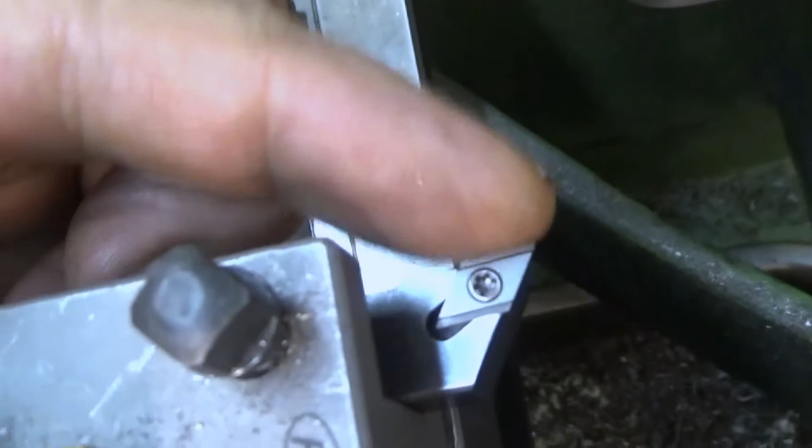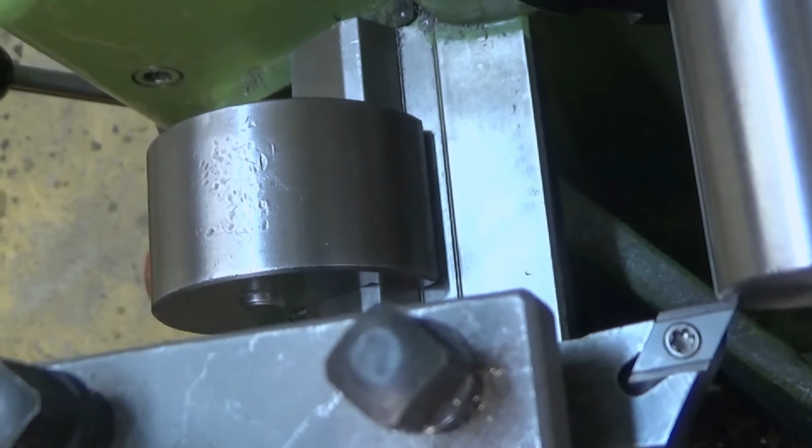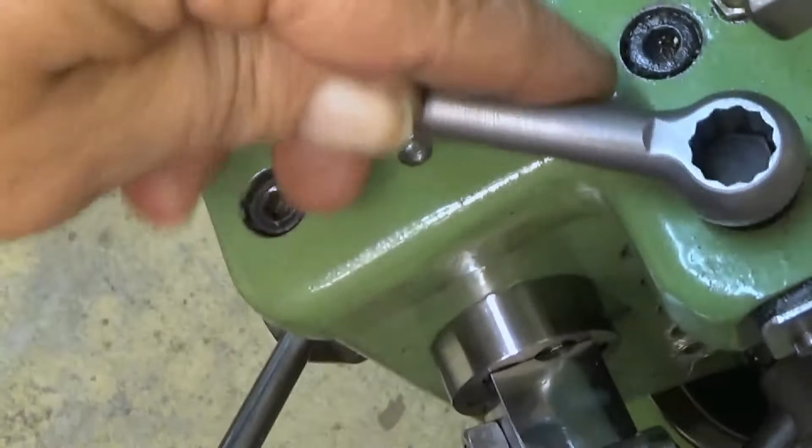There you are, I'm going to use that insert. That's very sharp and it doesn't introduce too much cutting forces. So now I will move the carriage so that it touches this surface here. That's there now, and then I will lock - here is the carriage lock. I will actually lock the carriage here, like that. Then I will move it back away from that, so that I don't damage that one.

And now we have a nice feature in this lathe, namely I installed this DRO recently. So I will now reset that one.

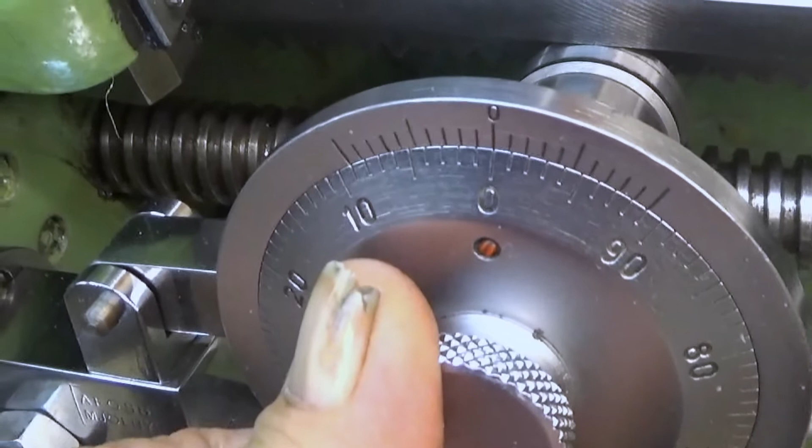This is the first time I use it actually for something. Okay, now it's there. I can now unlock my carriage, like that.

And then we needed 18 millimeters. 18. So, that's 10 millimeters. 18. There you are, 18 millimeters. Lock the carriage again, so I don't lose that place.

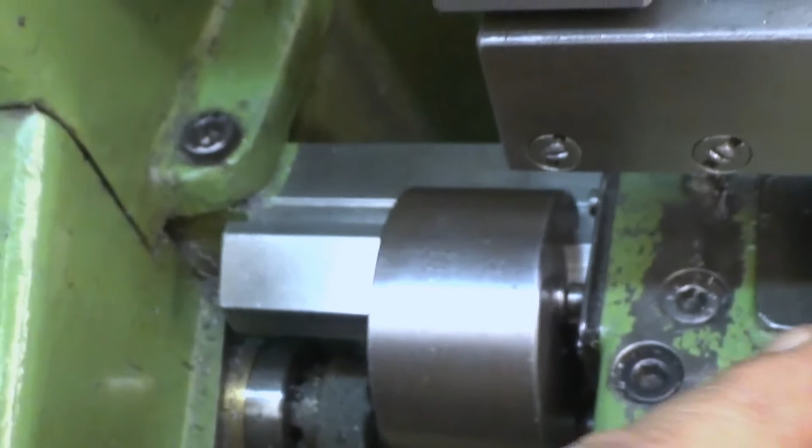And then, since the carriage is now locked, here is our carriage stop. I put it against this thing here, like that. This is the carriage stop. So when the carriage moves towards the headstock, it will stop here. And there is a ratchet mechanism inside this thing which makes it so that it doesn't damage the lathe even though it's a hard stop.

So now what happens, I can check this by loosening now the carriage again. And let's see, now we have here 18 millimeters. So let's move back and go back there. It stops to 18 millimeters.

So now the resulting thing is that we get 18 millimeters here, like peeled off. And now I don't need to worry about when to stop the carriage. I can use the feed. It stops automatically whenever I do this.

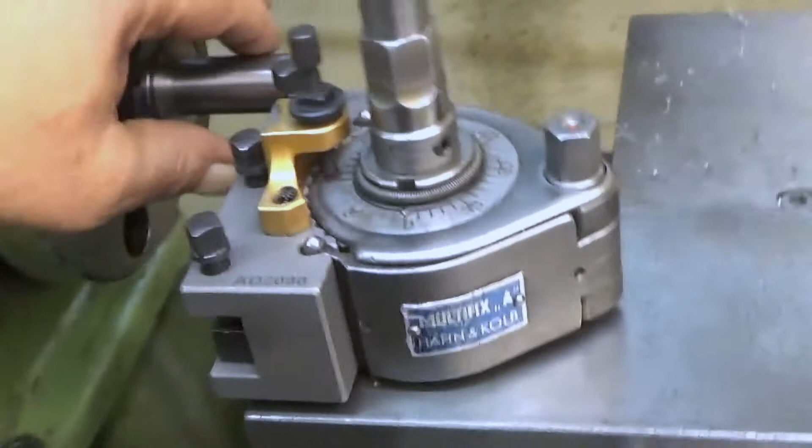And now I can take care of the diameter, which is actually quite important here. And the cut is 0.5 millimeters, meaning 0.25 millimeters per side.

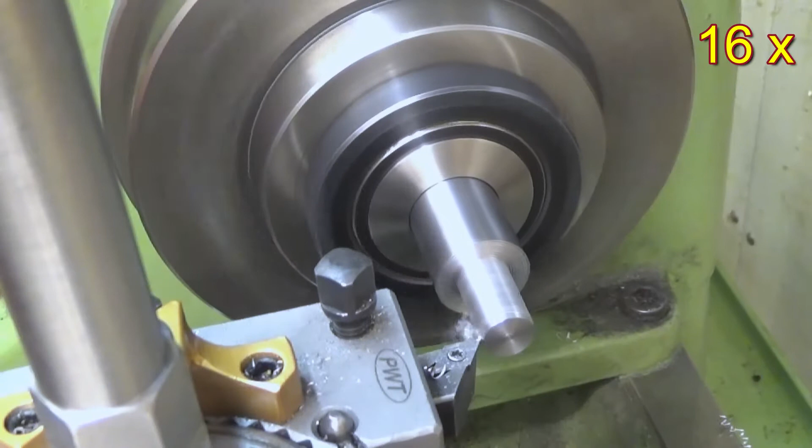Let's make this really accurate. So, and the surface finish is really good. We should be now 10.25. Well, we should be. We are 10.24. Okay, that's okay.

So, that's the last pass. Okay.

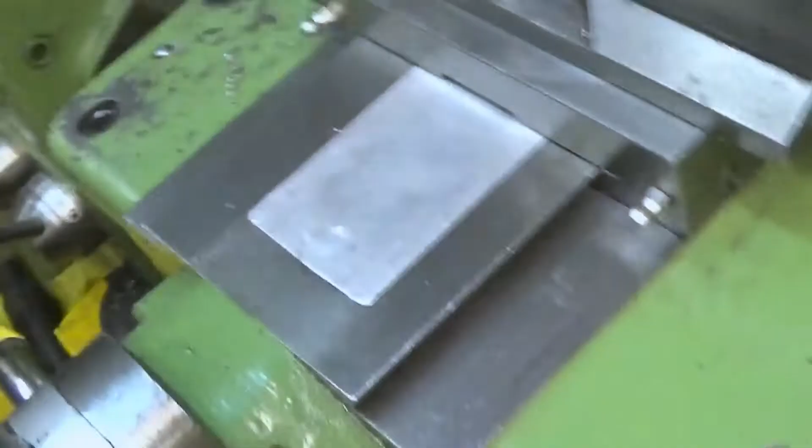We are now there, and I didn't disengage the feed. So the feed is now on. It has been pushing itself towards the workpiece, and now the tool is there, like in the workpiece. I will lock the carriage here. Like that. Now the carriage stays there.

Then I can disengage this, and then I unlock the compound like that. And what I will do next, I will actually feed in here just a little bit, and then I will face this surface. So let's do that.

I will restart this. It should do nothing, just rotate there. But now I feed with the compound a little bit. Like there. And then I feed by hand, coming out from there.

And there you have a very, very nice shoulder. Yeah, Chuck.

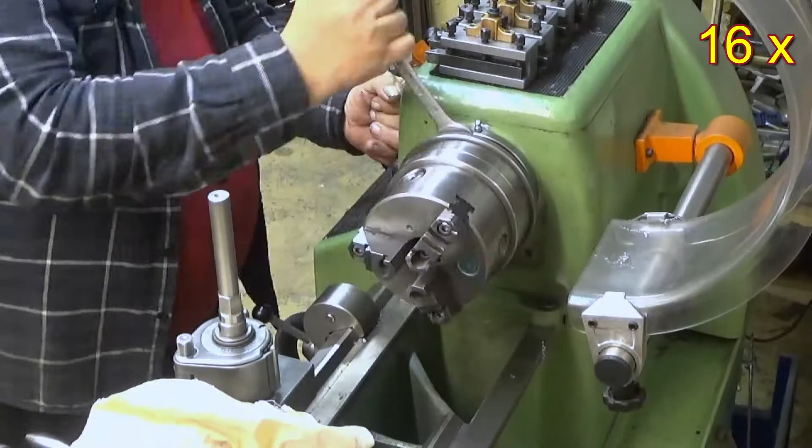So that is one. I have here like dimples. This one is one, and that's two. That's number three, and that's one.

Well, since it's now out from there, so I will actually do some cleaning for it. Yeah.

So, and which one is the one? That's the one. Well, that one is one. That's one too.

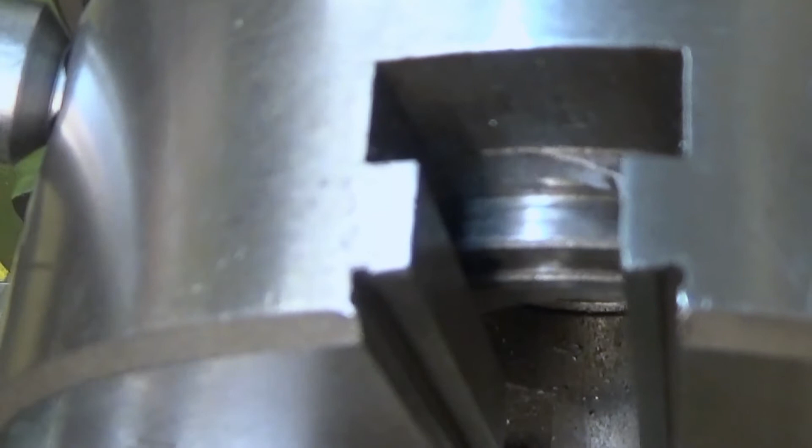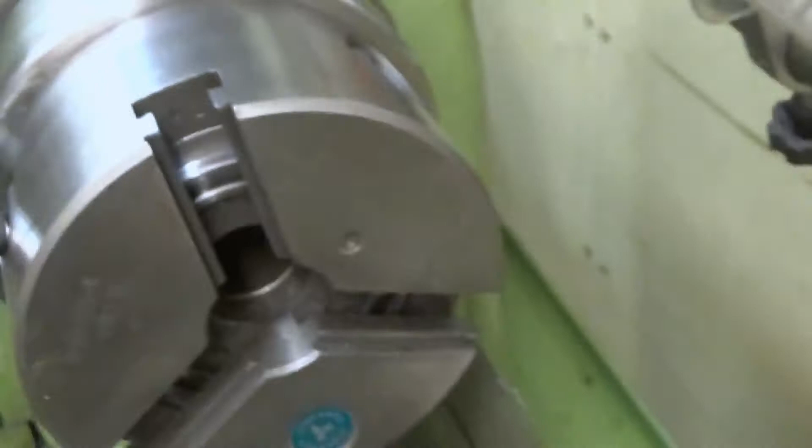So we need to put these back. So when I turn this here, at some point, as you can see, there is the start of the spiral. Okay, so I put it back there like waiting for me. And then when it's waiting for me there, I put my first jaw here and put it there, like that.

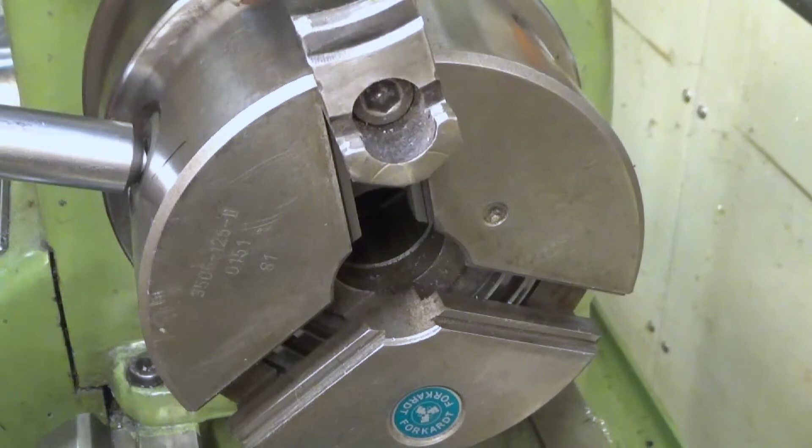Well, it's a very good idea to mark those in chalk, which one goes to which. You could mix them if you didn't, but that would be a problem.

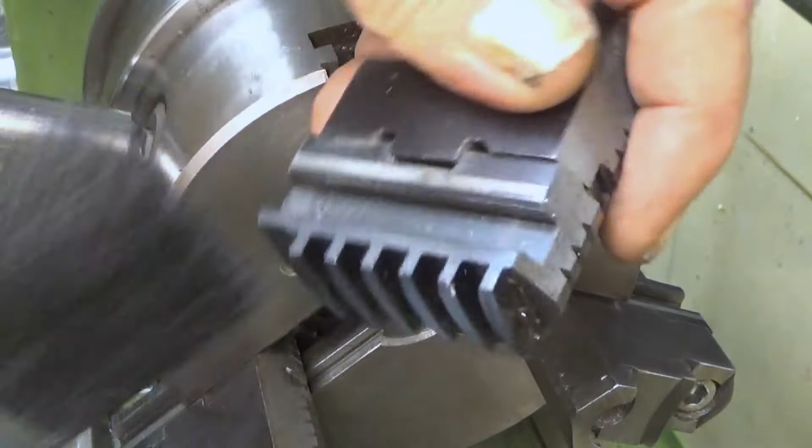So now when I turn this just a little bit, now it's past the first one. And then the last, same story. I will turn here until I see the spiral coming, and then I will clean this and put my jaw there.

This was, well, these are a little bit, okay now. And now what should happen? They should meet in the middle. If not, I did it wrong. Yeah, they meet.

So now I need to turn the jaws. I switched these to low gear, so then we just open these. It's very easy. Just take away the hex bolts from there.

This should be somewhat tight. They are like that. And then again, I get rid of any dirt in there and here.

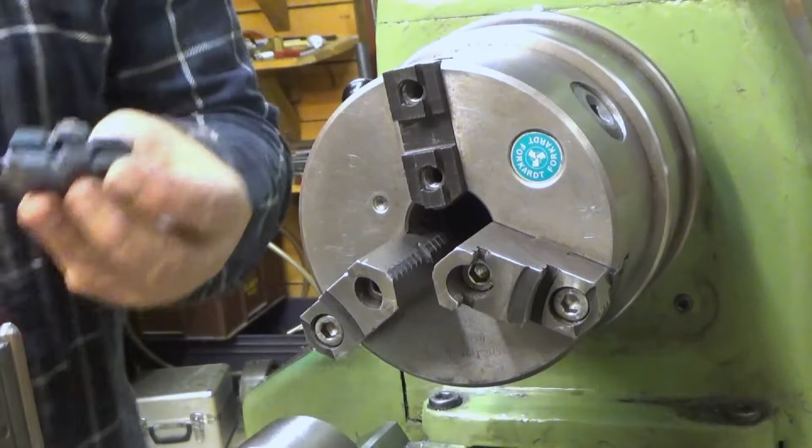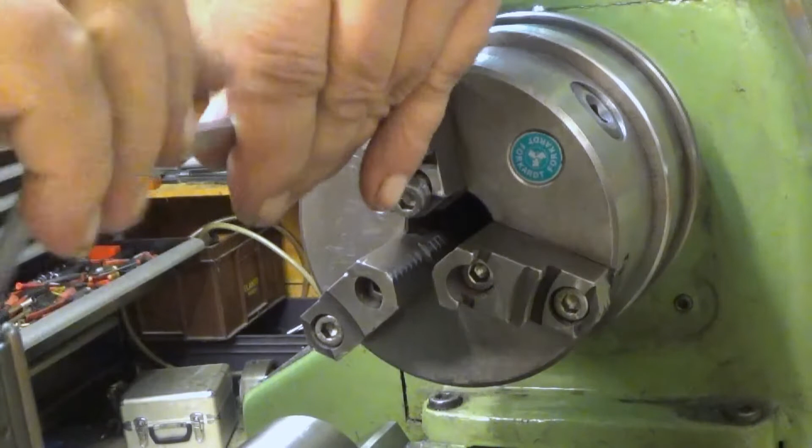Okay. And then I just put this here, this way. And now these bolts are of different length, so you have to pay attention to put them in the correct place. And then you just screw them back in.

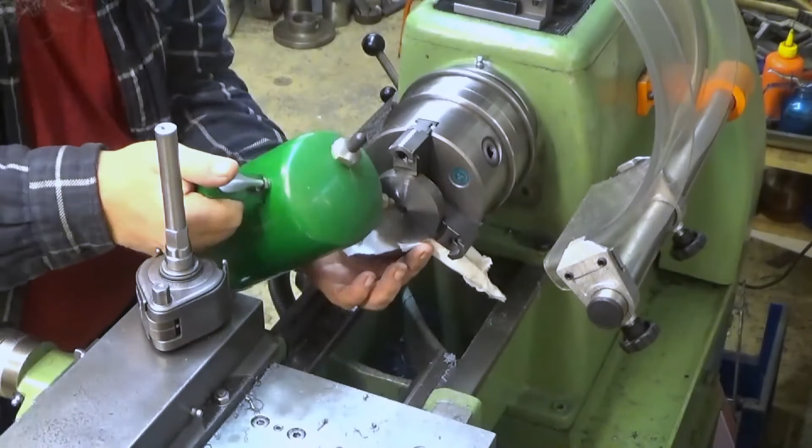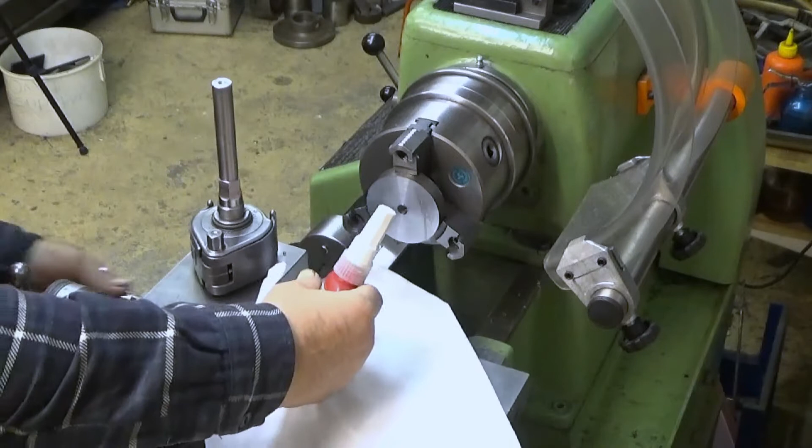Well, done. Wow. Well. Oh yeah, and this also had some cutting fluid in it. Not that much anymore. Yeah. I turned the machine off. There you are.

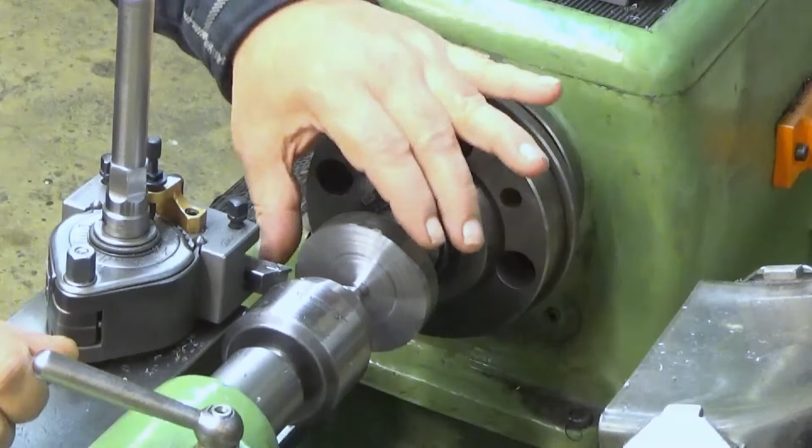Now this surface is good. It's not perfect - you can feel it, but it's okay. And then, well, that's okay.

Now I will turn the outer diameter. It should be 65 millimeters, about - it's not exact science how much it is, but well, it's a visual thing. So if I get it near to 65 millimeters, then it matches this outer diameter here. It's going to be placed on top of this here. And now I'm taking 0.25 millimeters from the diameter, but I'm feeding it 0.1 millimeters per revolution, so that should actually break the chips. And then the speed is around 400 RPM, not too fast. Let's see.

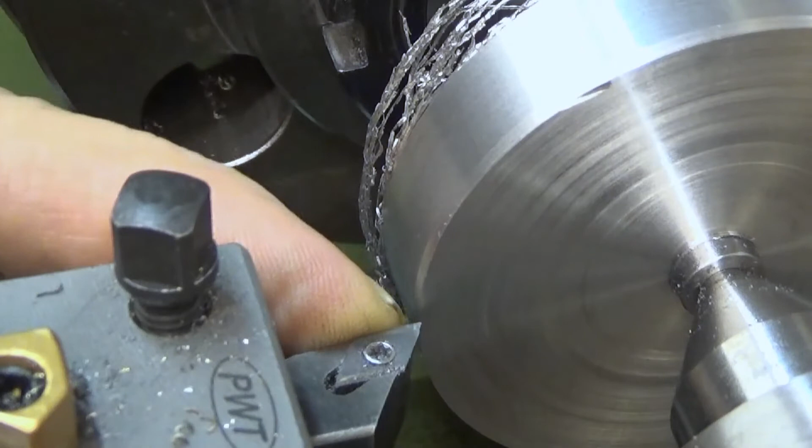Let's see if I can grind this. I did grind this on my CBN wheel, and now let's see if this surface becomes any better. It's really horrific. No, the surface actually is quite good, but this here on the back side reveals that it's not really sharp.

So let me try this. Let's take it like that and see how it does. Did it make any difference? At least the sound is very different.

Horrific pull from the backside. Well, it didn't - yet. Well, it's about to fall off. Yeah, okay, and this you don't pull like this, you take your pliers and pull it off. Oh yeah, okay, well, and the surface is even worse. You can, I think you cannot feel this, but I can tell this is not a good surface. I will change that insert.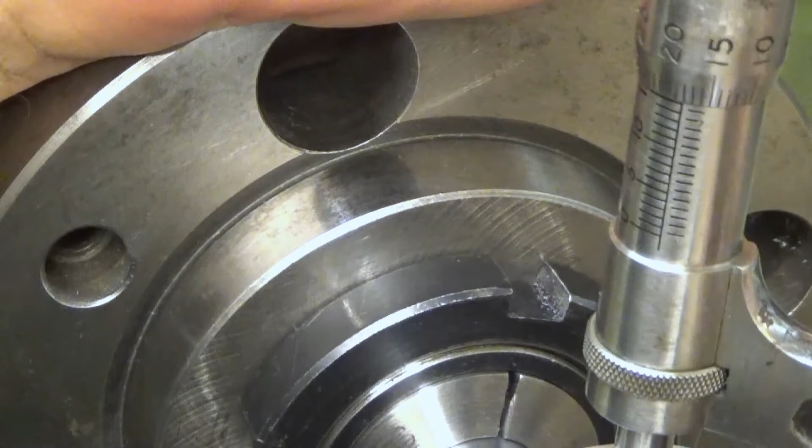So let's measure. Oh man, it's good surface. There you are, 65.18. Yeah, so this is the last pass.

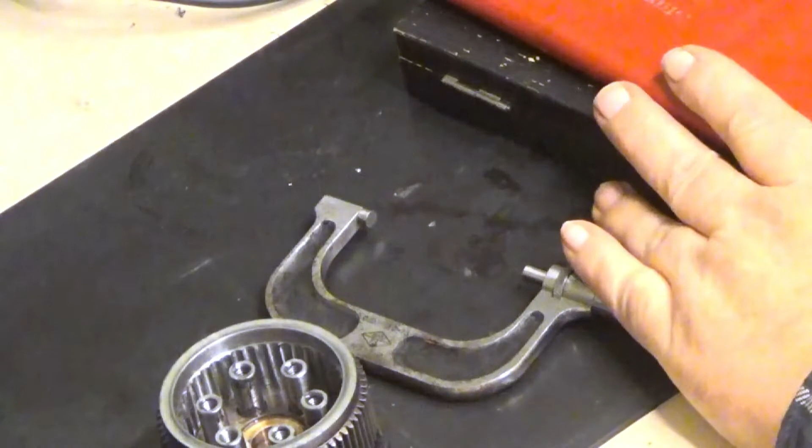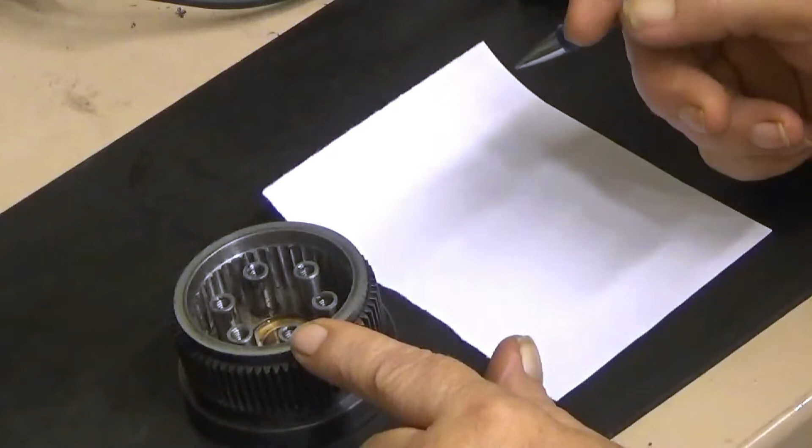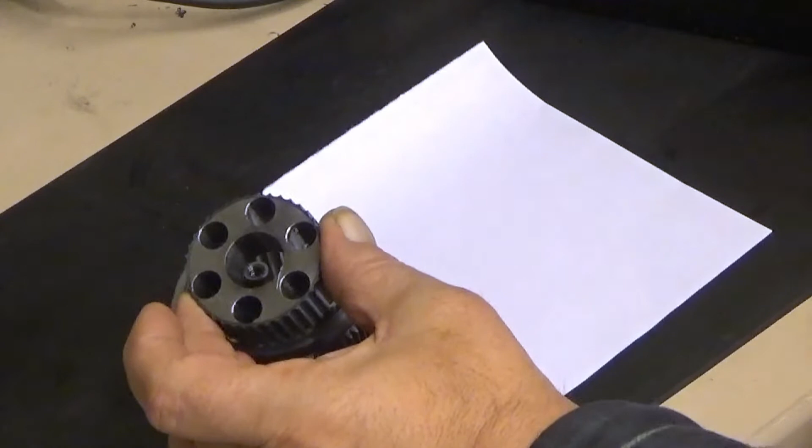Before we can go on with turning that cover plate here, we need to take some measurements. The lid comes on top of this, and there are these pins which have a place for a screw. The intention is to fix it with these screws on top, so it holds it in place. And then we have this thing there, which is in between like that, and these are a little bit proud here, so that it has room to be there. The interesting figure here is first of all the inner diameter of this here, this diameter.

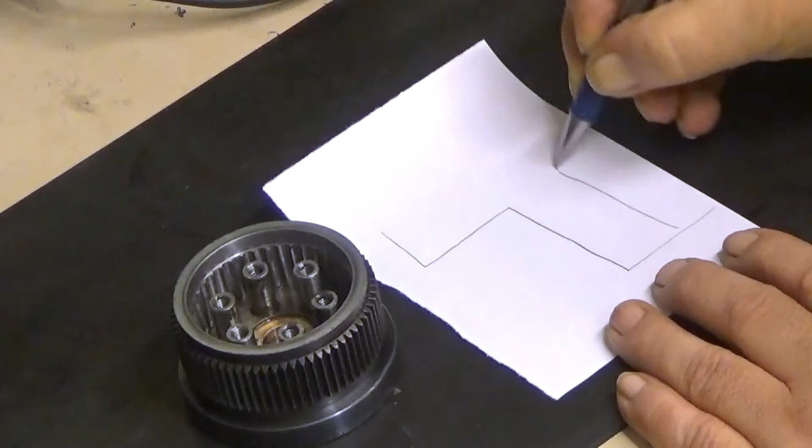That's one thing that is interesting. Another thing that is really interesting is the height from this top here to the pin top. We need this because, if you think about the lid, it will be like this, and then we have the cap screw coming through somewhere. And then this piece is going to rest like this here. So we need to know this distance in order to make a recess into our lid, this recess here.

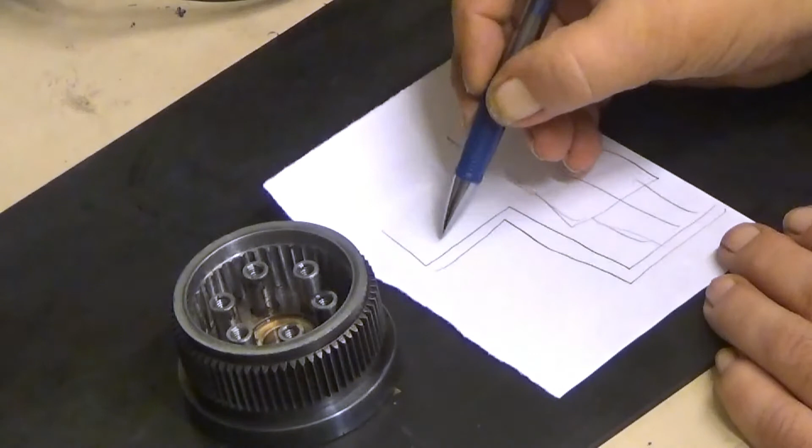So it's like this, and the first thing we need to know is this distance. How much is this? And then we need to know the diameter of that thing. Those two.

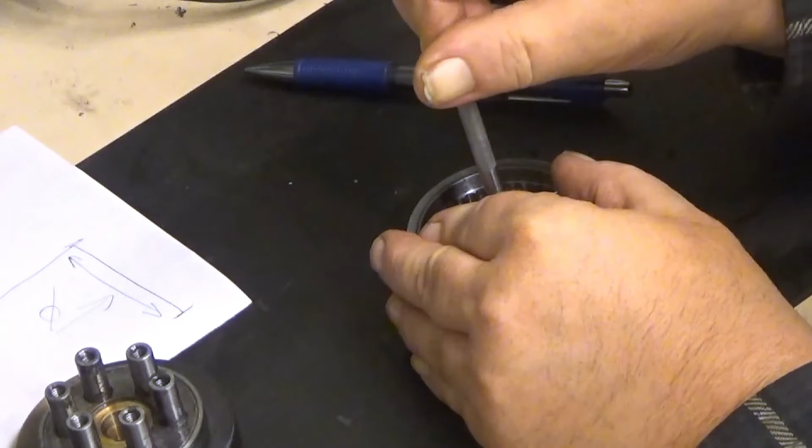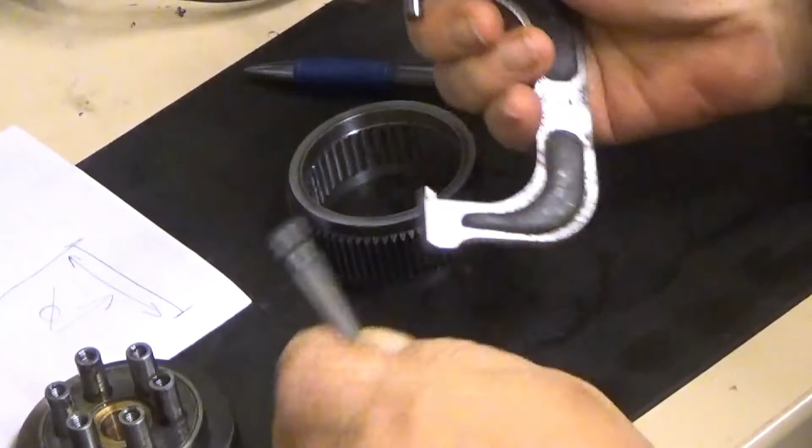Snap gauges. Is that a good one? Seems like it. You should put it a little bit tilted like this, tighten it, and then draw it. Okay, it might have the correct figure or might not. We will take several measurements here. I'm wiggling it until it comes in contact with that point.

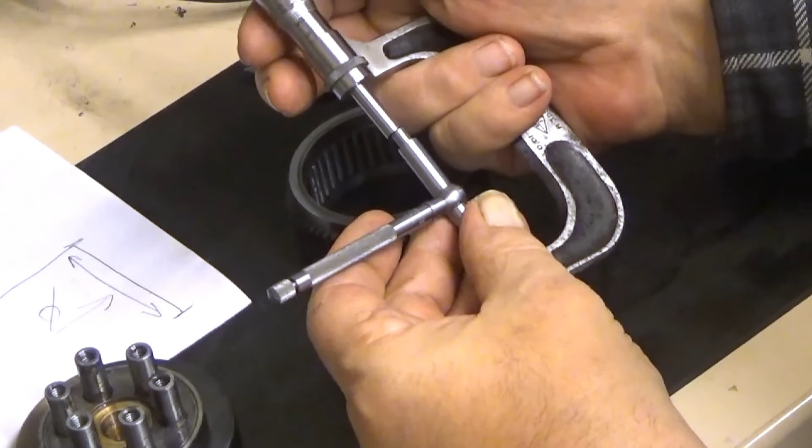I'm not using the ratchet in this case. Okay, I think that's our figure, and it seems to be 55.98. That was our first measurement. I'll write it down here. 55.98, and let's take another.

You have to tighten it. So it was 55.98, and now we get right there, 55, 56 exactly. Okay.

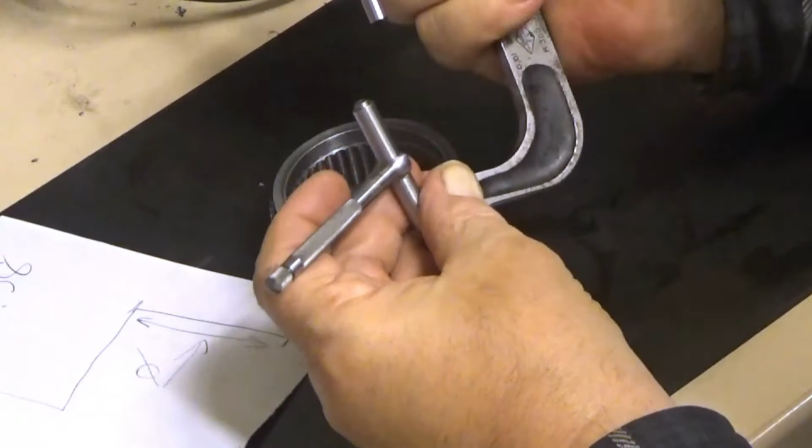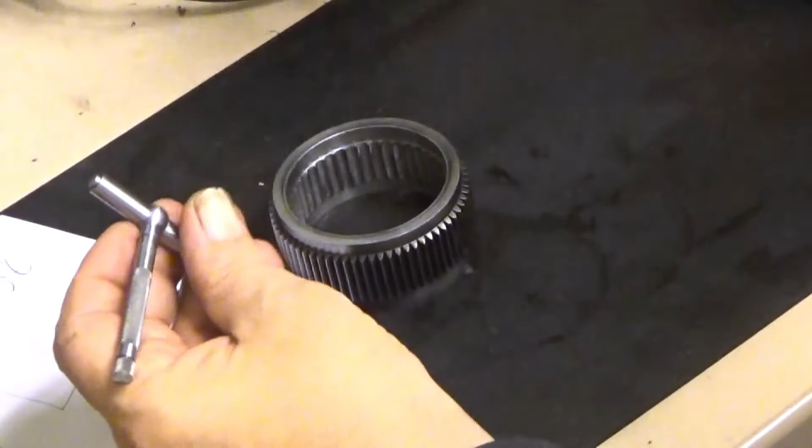So now we get a little bit less, quite a lot less, 55.94. Well, I reject that one. Let's see that one. Well, now it looks like it's 56 again. Okay.

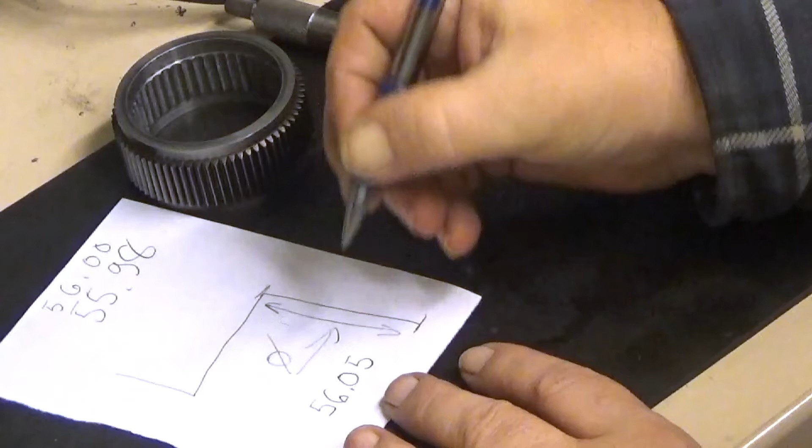So maybe we can assume that it's 56 millimeters. Means that I want to have some room there. So what we are going to make that diameter is 56.05. Shouldn't that be the other way around? That would now create a tight press fit. So the correct dimension might be something like 55.95. I think that's a reasonable value for that.

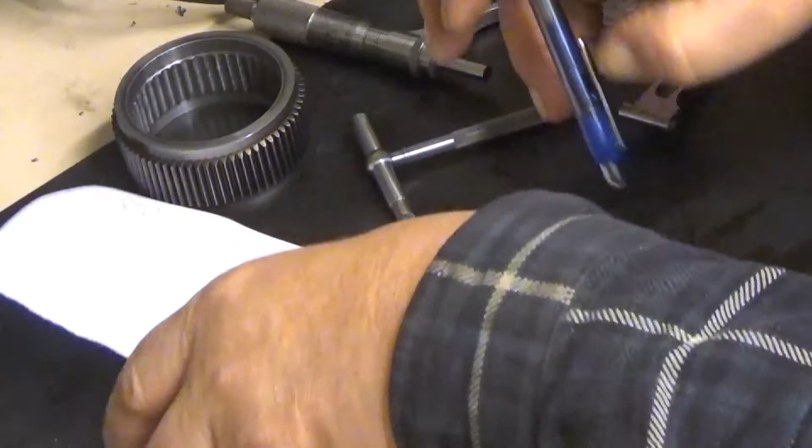The next thing is that depth. I'm very bad in reading these, so now it's 5, 5.5, 6, 6.55.

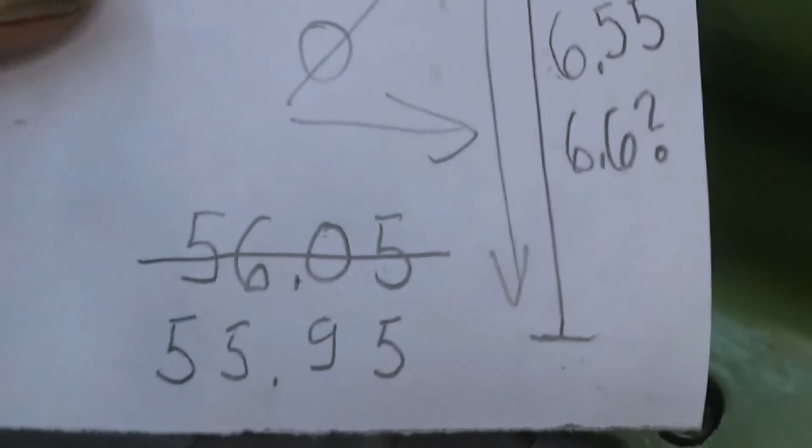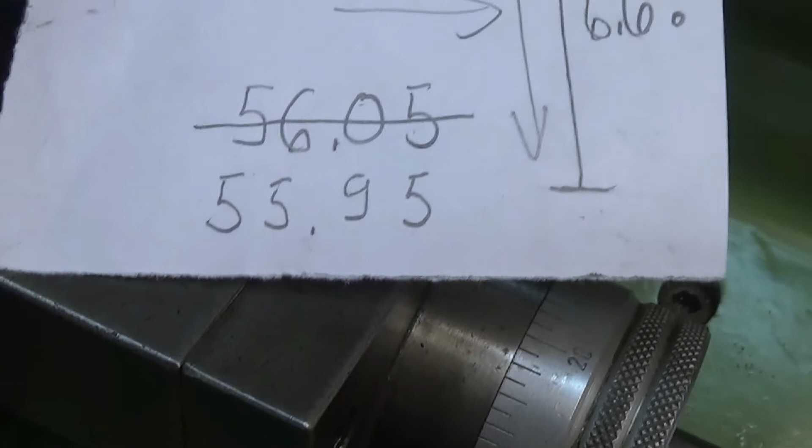Made a mistake here. That figure, 56.05, I would have made it larger than the smallest diameter I measured. That means it would be really tight, actually a press fit. So it should be smaller actually. So 55.95 is what we probably aim for with the diameter. And the depth was alright, so 6.6 is what we aim for.

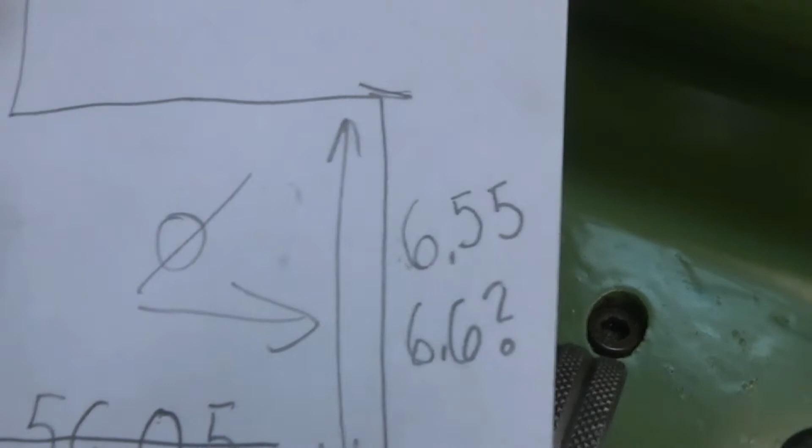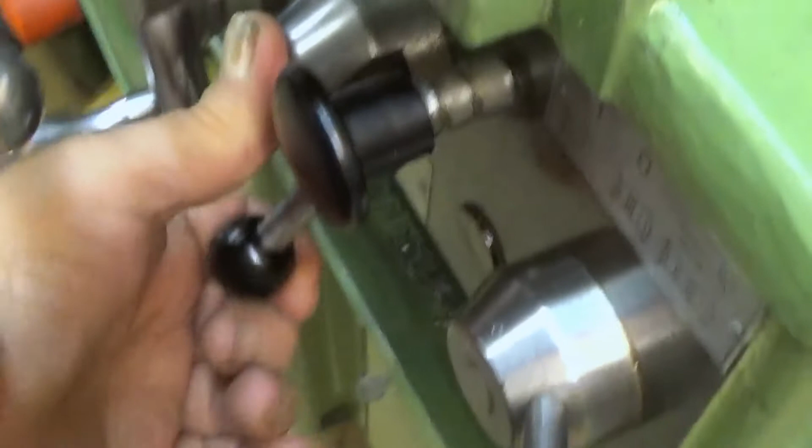So now I'm going to set up accurate depth here. First of all, let's switch this on. I have locked this, this is the carriage stop. I have locked it, it's tight and in place. And I will engage the feed here, and I will drive it against the stop now. You can see it's no more turning that way, so now it's against the stop. Then I stop the lathe and lock the carriage here.

There it is. And then I can disengage the feed and I will touch that surface now. Let's see now. Well, okay, so now we know that this blade is exactly on the surface near that one. And the carriage is at the end of travel, where it goes before it strikes the stop.

First I will unlock this, and then I will move the compound the required amount, which was actually 6.6 millimeters. Here, 6.6. Even though I would like to leave something for cleanup, so I will move it to 6.55. Okay, so one turn here, that was 3, that is now 6 millimeters. Then this is 6.5, 55. So this focus is not very good.

This really amazes me every time how bad it is. So 55, there you are, that's the one we want. And now I lock this, and now I will touch this outer surface. Turn this against the stop as many times as required, and it will be 6.55 millimeters deep. We have 10 millimeters, almost 10 millimeters, to take away from the diameter.

Well, 56.22, and our goal was 56.05. And this is our last cut. So.

And yes, I left it intentionally into there now. So now the next step is to lock the carriage here.

It is now pushed against the carriage stop, but I lock the carriage here, disengage the feed, and now we had 0.05 of a millimeter more spare.

I will beautify this face, this little ledge here now. So I will turn the lathe back on. Feed in the 500s here.

Like that, and then manually take it away from there. This should clean up the surface.

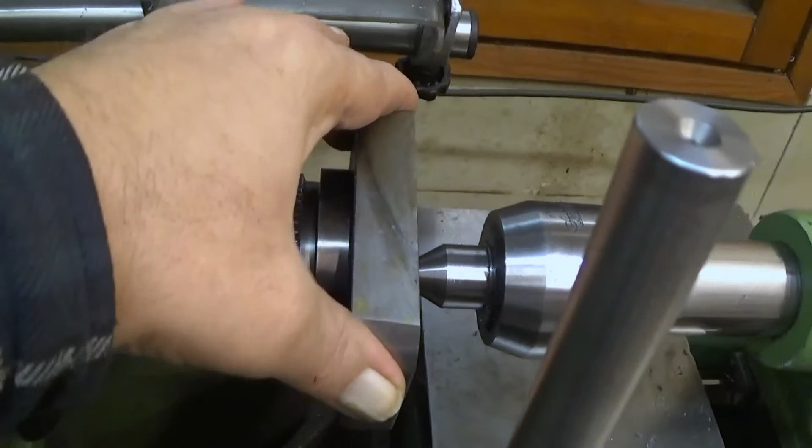There you are. The tailstock is pushing this quite heavy piece of metal here, and then we have these, so it's actually pushing the pins there inside, and yeah, this is moving freely.

It has a little bit of play in it, and it's okay. Sideways no play, but axial play, that's totally okay.

And this is just to create an optical illusion of professionalism here. So.

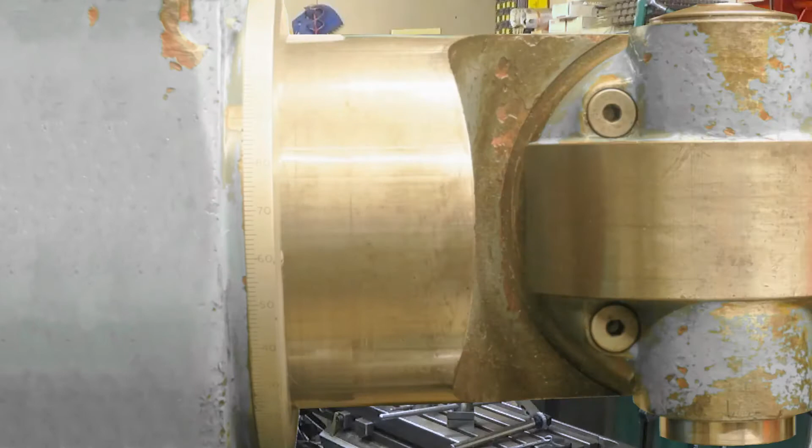Now we have a very good optical illusion here. Next, I will put this one into that one.

Yeah, okay. Next we will shift the table to the bolt circle diameter, if my memory serves me correctly, is 35 millimeters. So we have to move the table half of that.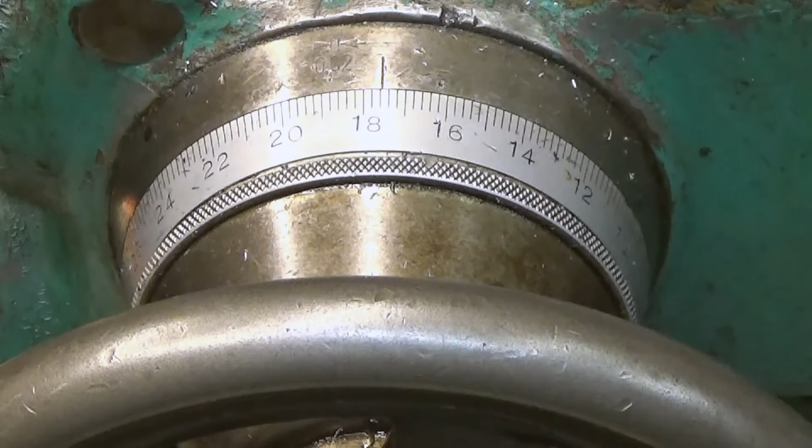35, is it? Nowhere near. Oh, man. Let's take this again. 17 millimeters, not 1.75, 17 millimeters. So 16 millimeters is 4 turns.

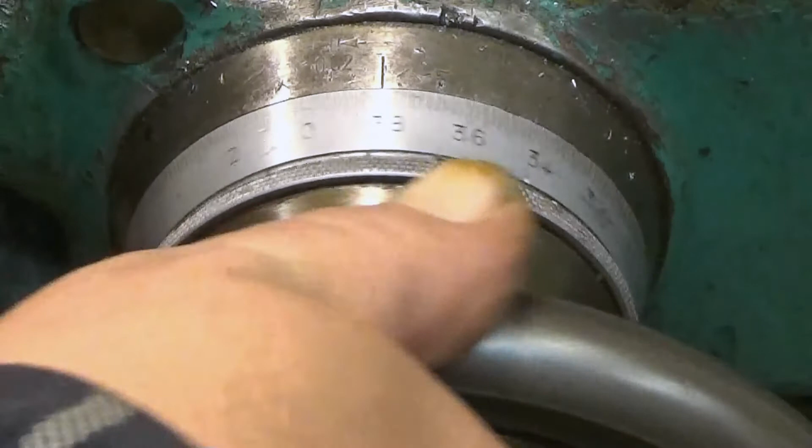So 1, 2, 3 and 4. So now this is 16 millimeters. And now we need 1.5 millimeters more. And that's 1 millimeter, 0.5 is

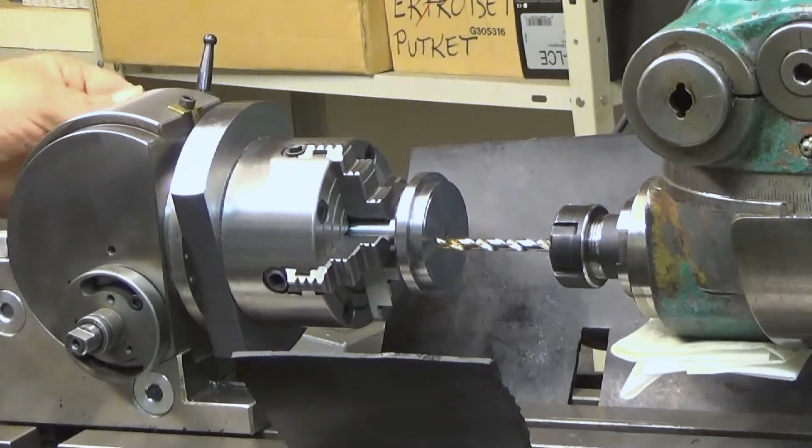there. This is now in 0 degrees position and it's locked, and I will be using direct indexing. Let's see about the speed of the drill. Yeah.

There you are, 6 holes.

Well, I have now cut off the mandrel away from this workpiece because, well, it will not be part of the device.

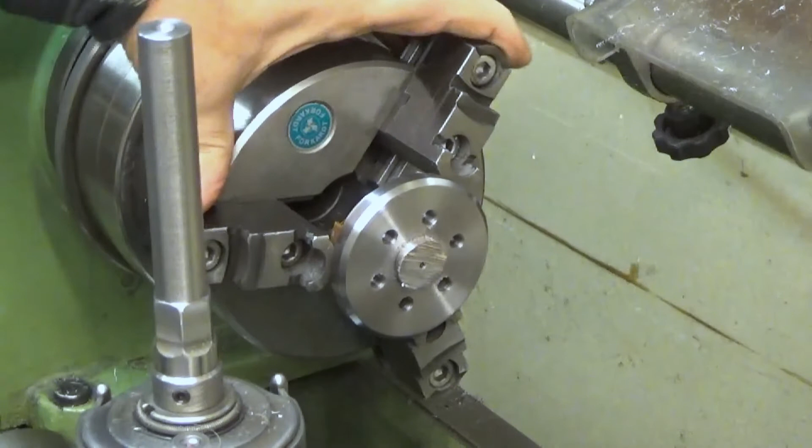I did cut it with a hacksaw, and you can probably see it's not very straight. It doesn't need to be at this point, so we just make it straight now.

I'm going to use the compound for feeding this, and yeah, just doing this manually.

A little bit more, maybe. A little bit more. That's it, we are all the way we can.

And as you can see, it really pulled all the chips out from there. And that's one nice thing about spiral flute taps, that they do that.

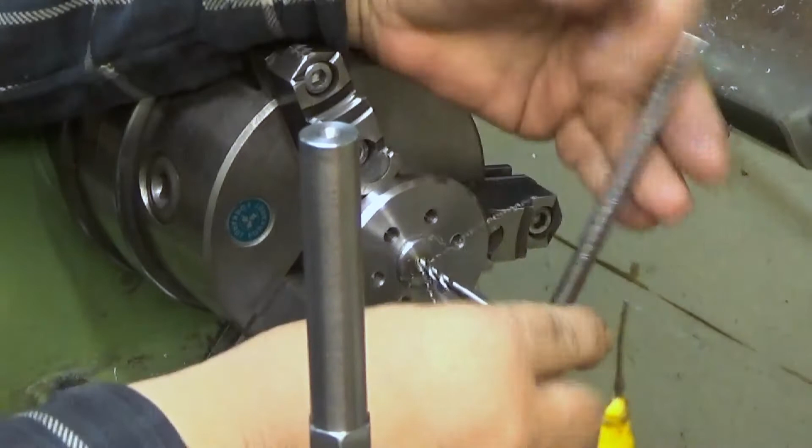So you have less to clean up in the hole. You have some cleanup to do, but not much. There you are.

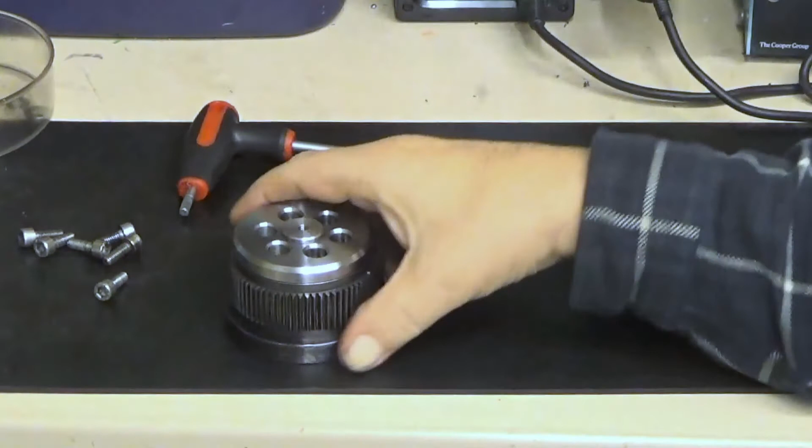Well, if I squeeze them, I should hear something rattling inside. Yes, definitely. Good. And then just put the screws on.

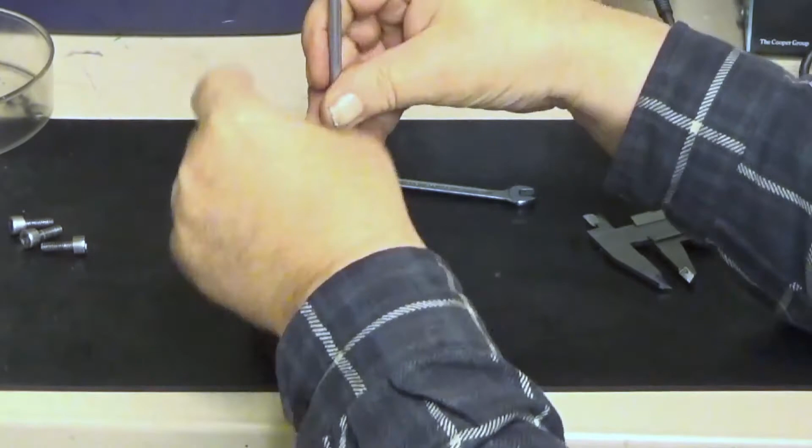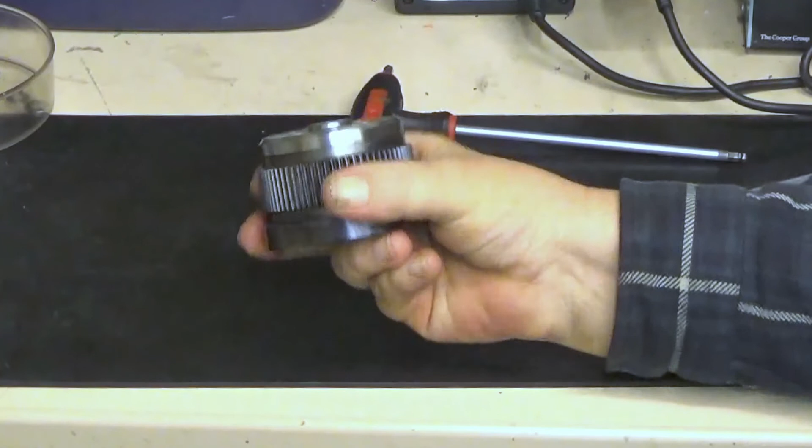There you are, and it's still rotating. Is there still something loose inside? Yep, there is. Well, then we have the last bit of the puzzle, this thing which goes on top of here. This is how it now looks.

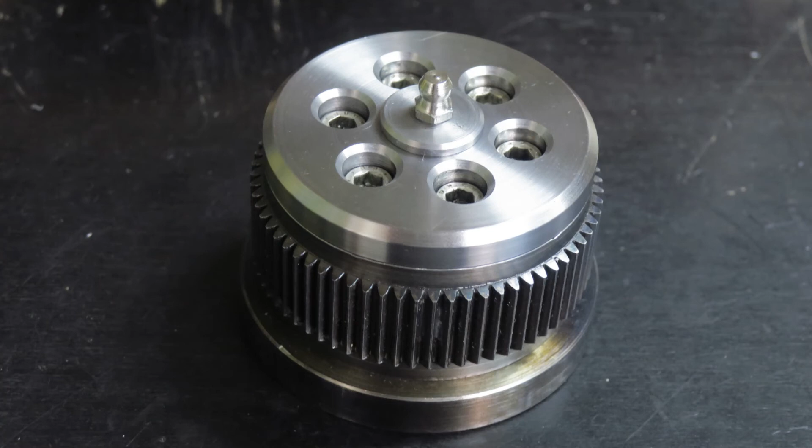That about concludes this episode of Finno-Ugric machining. In the next episode we start to put this on something where you can really use it.

You have been, I know that you have been wondering, how do I attach this kind of round thing to something? Yes, I have been wondering the same thing. But I have a few solutions for that one.

I'm happy with this one. Hopefully you enjoyed this simple episode of Finno-Ugric machining. Till next time, see you!